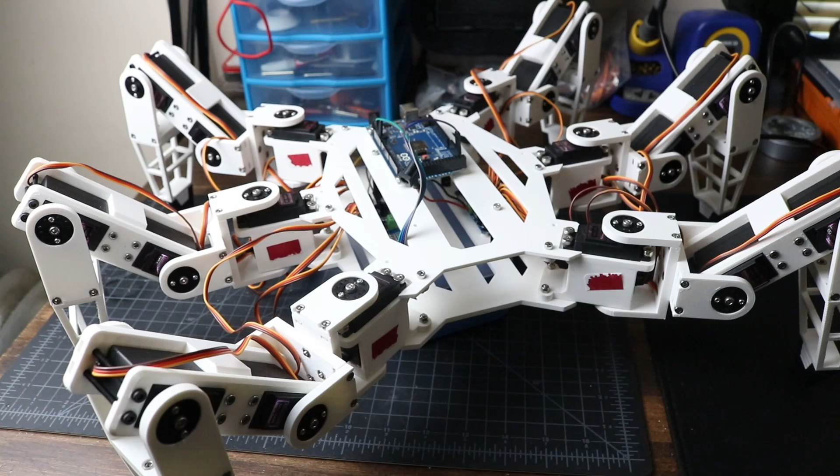In the last video, I started working on the leg design for my new Hexapod robot. Today, we'll be finishing the mechanical assembly and start working on some of the electronics. So without further ado, let's get started.

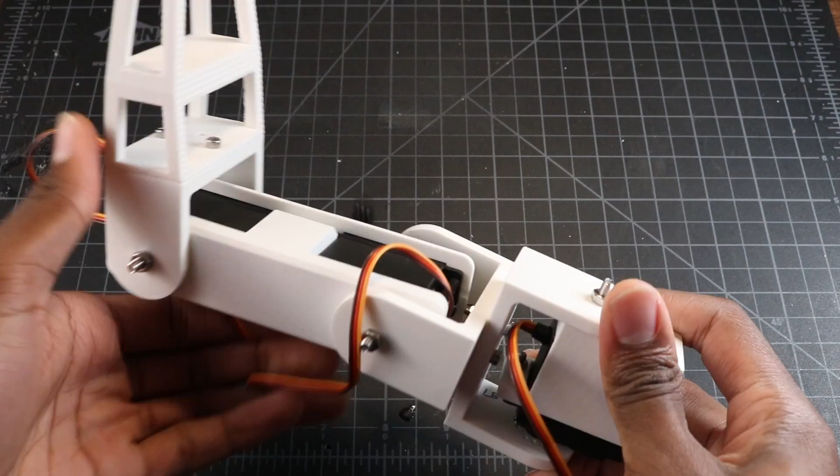The current design for the leg is quite functional, and to be honest, not much needs to be changed. In the previous video, however, I did mention a handful of things I wanted to modify about the design to help improve functionality and assembly times. To start, I redesigned the servo holder for the first servo in the joint to add a spot for it to attach to the body plates of the Hexapod.

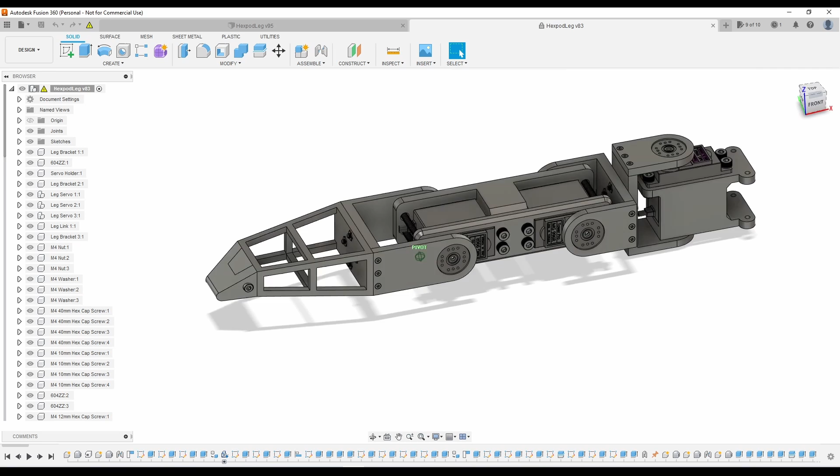Each leg will get attached to the main body with either 2 or 4 M3 screws, depending on whichever is easiest. I then broke up the tibia portion of the leg into 2 pieces, the main tibia and the foot tip. I did this so that I could print the foot tips in different materials to help improve grip, while also making the parts a bit easier to print out. They get attached together using a single M3 screw and a captive square nut inside the foot tip.

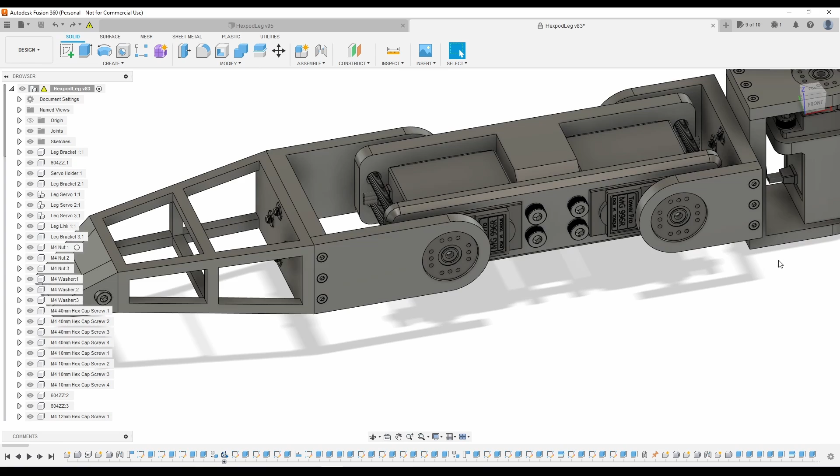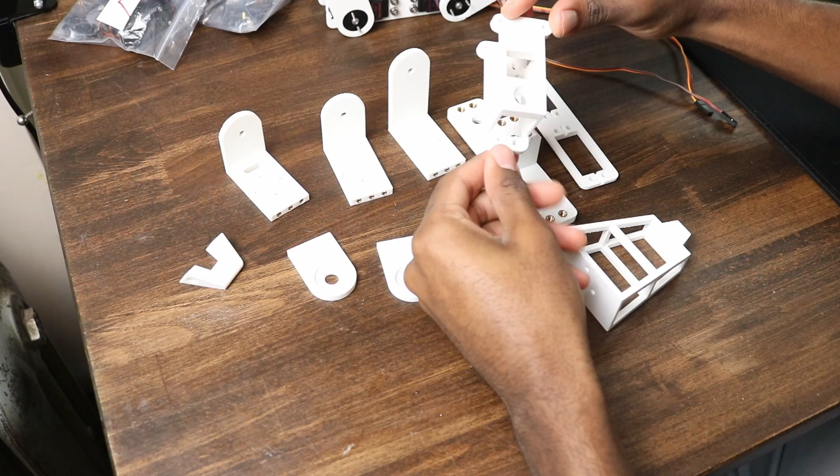I also increased the length of this bracket for the tibia so that the leg has a wider range of motion. I kept the overall lengths of each part of the leg the same as before, since the size of the prototype leg seemed proportionally correct. After making these changes, I decided to print out the parts and assemble another leg to see if things were working as expected. While assembling, I started to get frustrated with the tiny M2 screws I was using for the brackets, since they were harder to drive in than the other screws. But besides that, the design changes were working as intended.

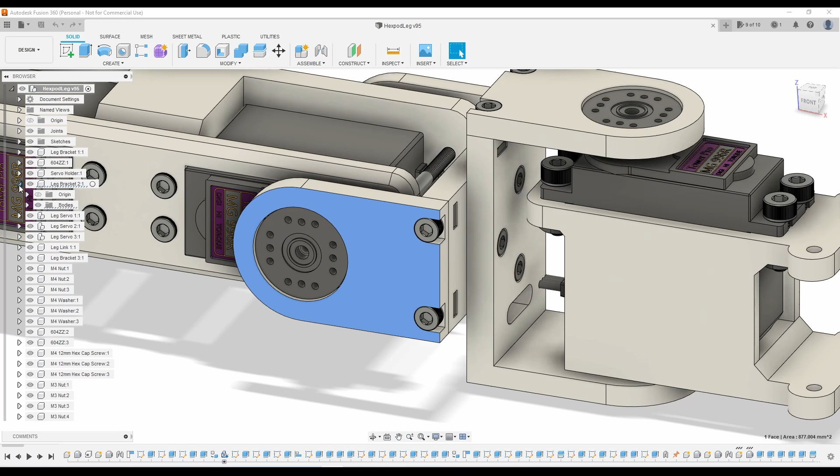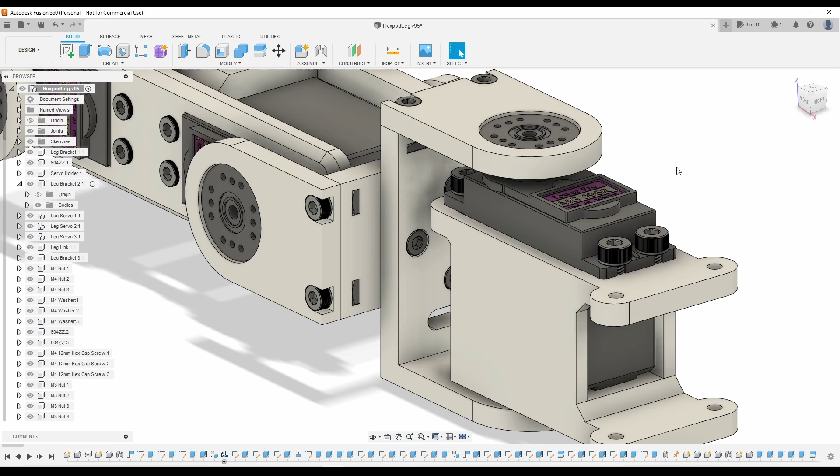I went back into Fusion 360 one more time, this time modifying all of the brackets on the leg so that they are now all put together using 2 M3 screws and 2 captive M3 square nuts, instead of the M2 screws with the threaded inserts I was previously using. I did this to help decrease the number of parts used for the robot overall, and to reduce the price since the threaded inserts can be more expensive depending on where you buy them from. I also switched out the M4 screws and threaded inserts on the femur for M3 screws and captive nut slots as well.

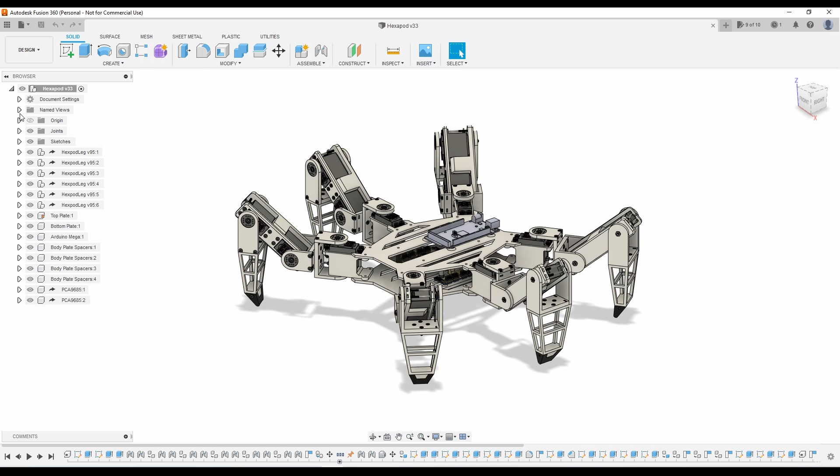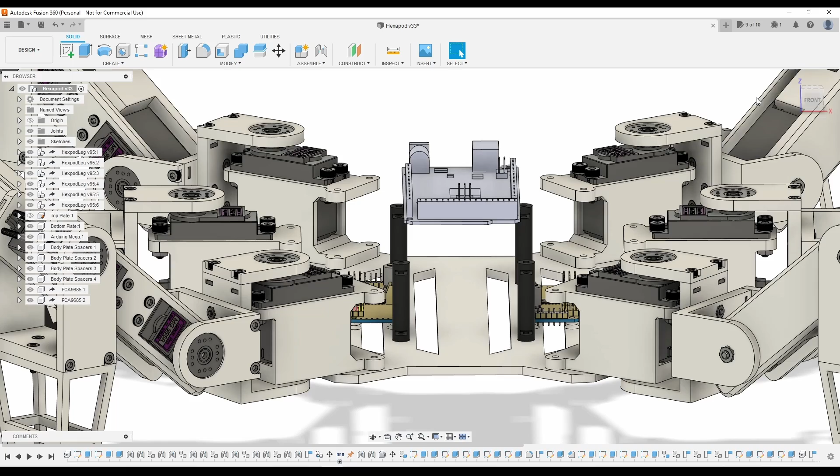For the body of the Hexapod, I'm going to keep things simple for now by only adding a space to mount necessary components: the main microcontroller, likely an Arduino Mega for now, 2 PCA9685 16-channel servo drivers, and a battery. The body will consist of 2 plates that get sandwiched together and connected to the servo holders for each of the 6 legs. To support the center of the body, I'll be using these custom spacers that have slots for 2 M3 square nuts. 4 of these should be enough to keep the body rigid and prevent any flexing during movement. The 2 servo drivers and the other power management stuff will be mounted to the inside portion of the body plate using some generic mounting screws.

In the future, I'd like to mount some more electronics to the body, like a Raspberry Pi Zero, Pi camera, an IMU, and any other sensors I'd like to mess around with. There's plenty of space for all that. I'll just need to modify the design a bit more to add mounting holes for everything else when the time comes. That'll have to wait until later though. So for now, let's get these parts printed and start assembling the robot.

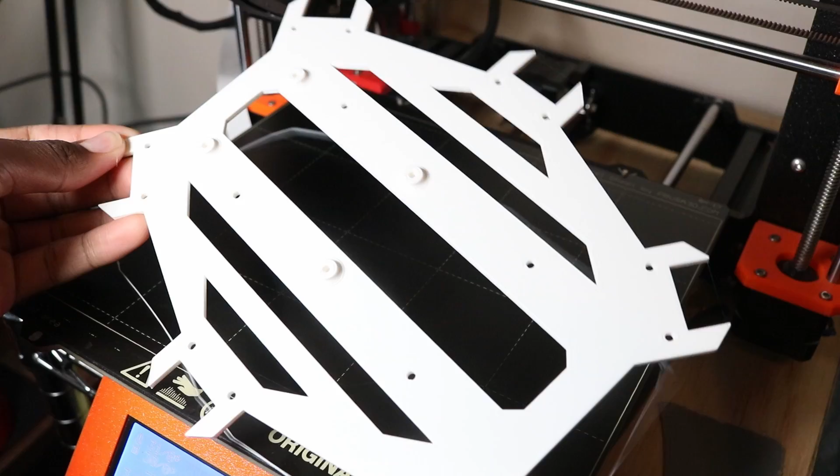Assembling the legs is a straightforward yet repetitive process. One important thing to note is that half of the legs will need to be assembled mirrored. This will make it easier to program later on when I'm working on the software. Otherwise, I might have to do some extra math when working on the kinematics for the robot.

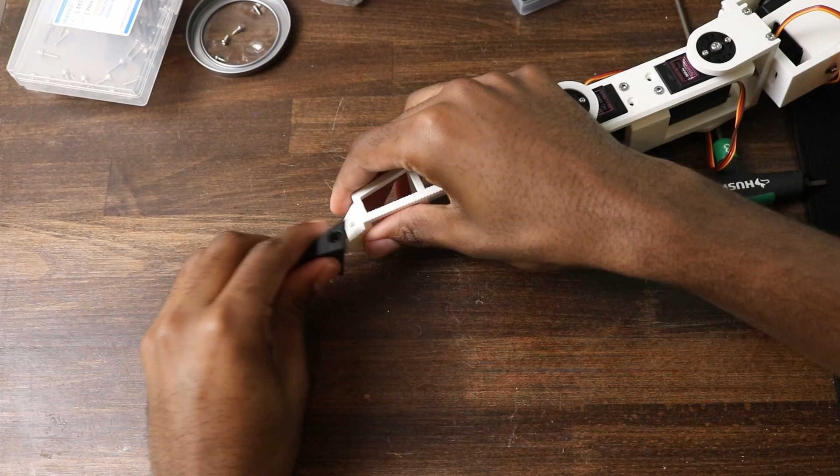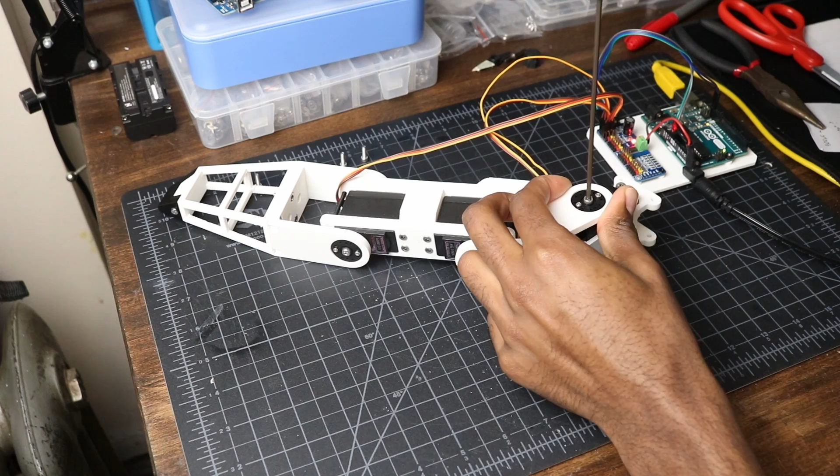Before I can mount the assembled legs to the body plates, I need to calibrate each leg. The calibration process is simple. I just set each servo motor to a specific angle and then reattach the brackets in the correct position. It's important to do this now so that when I'm programming the Hexapod to walk later, I can assume each leg will move to the same position for a given angle, hopefully within some small margin of error. It also ensures that I get the full range of motion needed to actuate the legs during movement.

To help with this, I made a simple Arduino sketch that will move each servo to the correct positions for the mounting brackets and then test the range of motion for each joint.

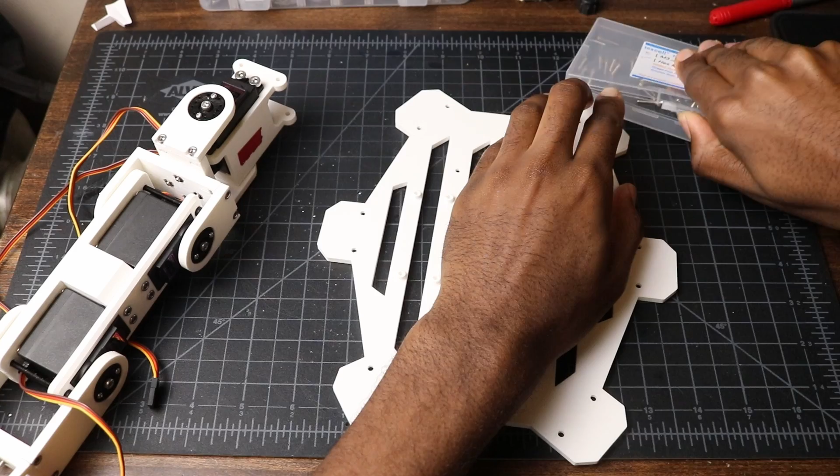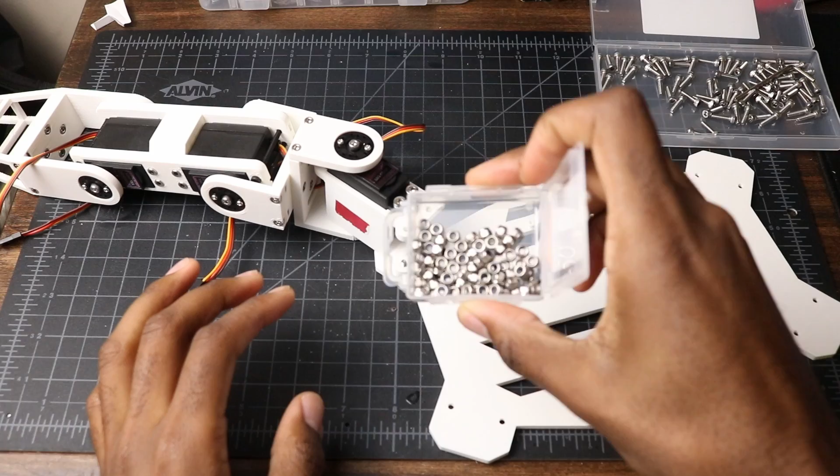With the legs calibrated, I began attaching them to the bottom body plate. Here I'm just using some of the leftover M3 12mm screws and M3 lock nuts to secure the legs to the bottom plate. The lock nuts will ensure things stay rigid and connected, protecting them from vibrations during movement.

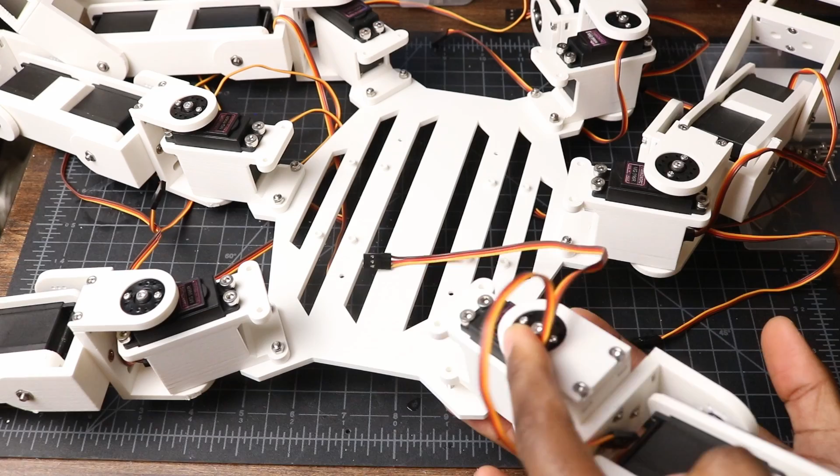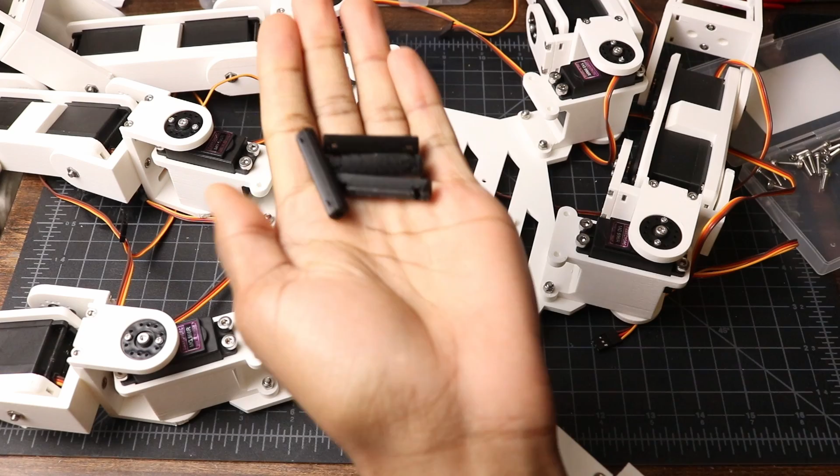The top plate will be connected in a similar fashion using the same M3 screws, except this time I'm just using regular M3 nuts. To keep the middle portion of the plates rigid, I installed the 4 spacers to the middle of the body plate. This will hopefully prevent the plates from warping or bowing in the middle.

And with that, I've completed the mechanical assembly for the Hexapod. I'm quite happy with how the robot has turned out. The aesthetic is on point for what I was going for, with a simple yet sleek design. It almost looks like a wireframe outline of a hexapod rather than a hexapod itself, which I think looks pretty cool. Not only that, but I'm also happy with the amount of space I have to mount some electronics like a Raspberry Pi, camera, and IMU, among other things.

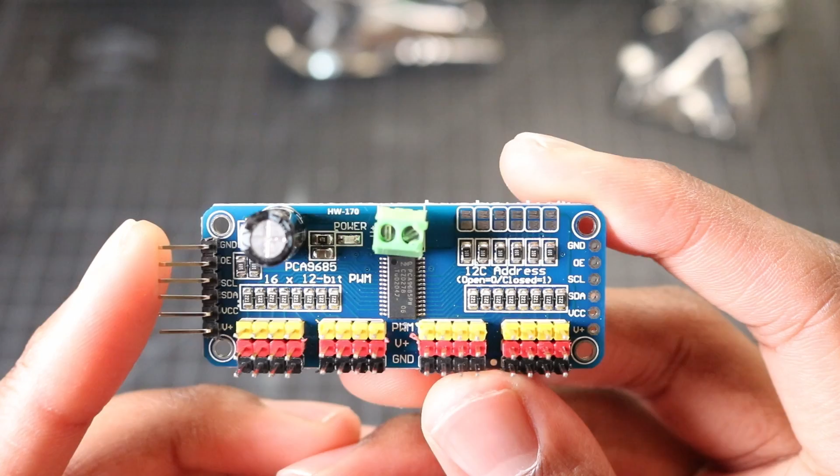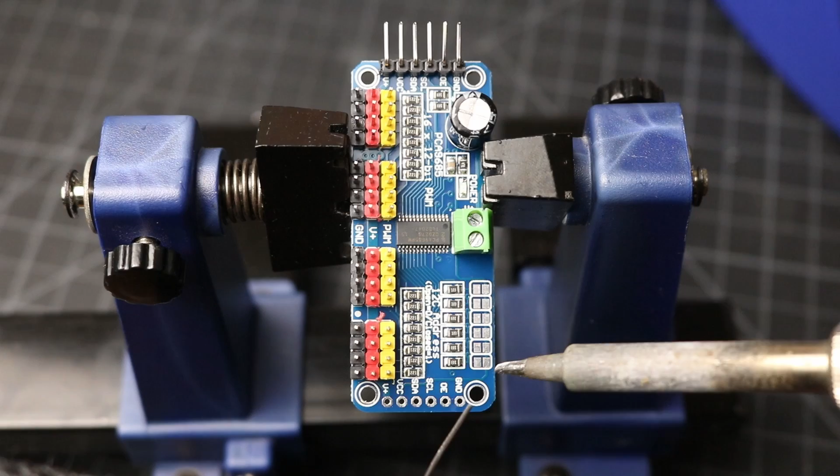That being said, let's get started on the electronics and hopefully get part of the robot working by the end of this video. For the electronics, as discussed in the last video, I'll be controlling the servos using 2 I2C servo drivers, one for each half of the robot. These drivers use I2C to communicate and will be connected to the Arduino Mega via its I2C pins 20 and 21. In order to connect the 2 drivers to a single I2C line, I first need to bridge the A0 jumper on one of the drivers. This changes that driver's address from the default 40 to 41 in hexadecimal. Now I can communicate with both drivers on a single line without issue.

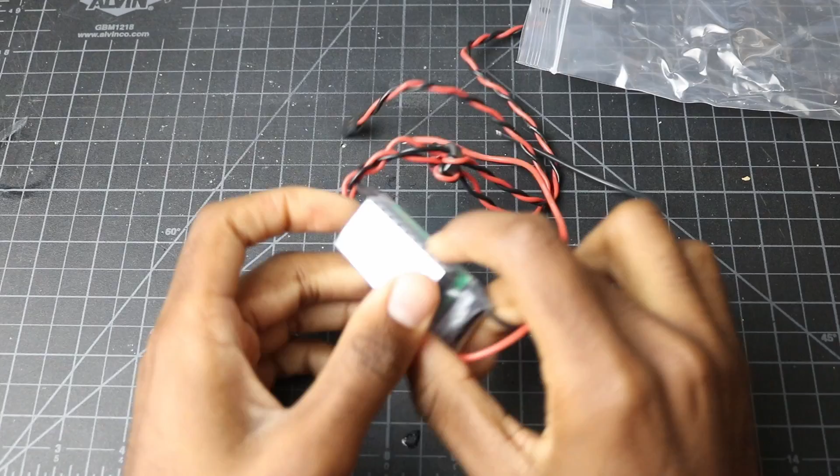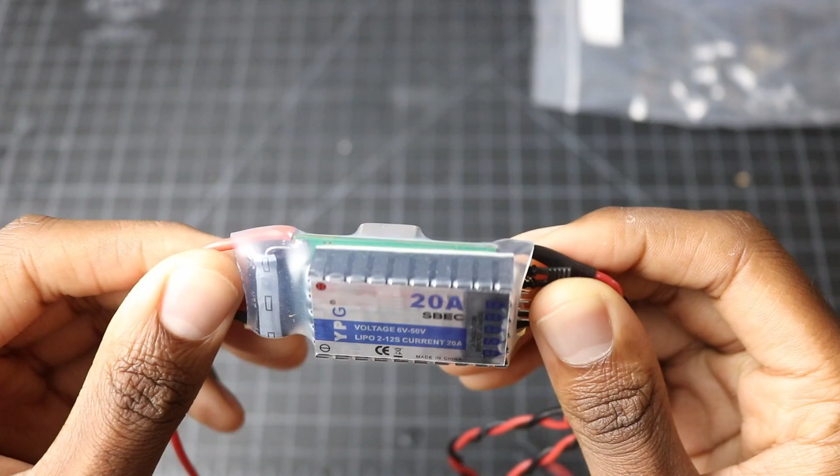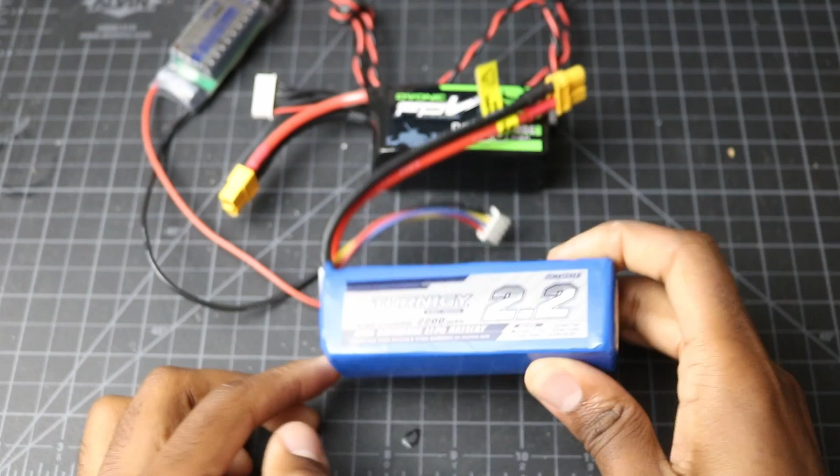To power the drivers, I picked up this SBEC, or Switched Battery Eliminator Circuit, from Amazon. By setting the desired output voltage using the included jumper, you can produce a regulated output voltage and provide up to 20 amps of current. The SBEC will help convert the input voltage from a LiPo battery to a usable 6 volts for the servo motors. Unfortunately, I don't have the correct LiPo battery at the moment, so for this video I'll just stick to powering the legs one at a time using the 5V 4A power supply I used to test the legs before.

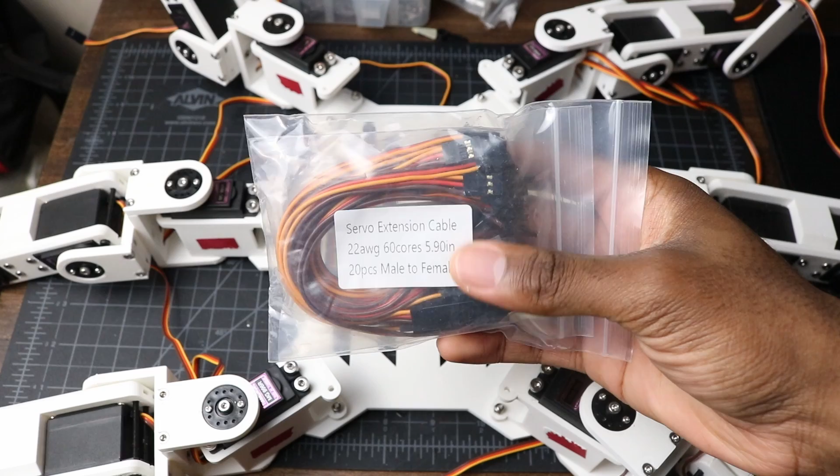The 2 servo drivers get mounted to the bottom plate using some M2.5 screws. Each driver is powered from 5 volts via the Arduino Mega, and their I2C pins are both connected to the I2C interface on the Arduino. Some of the servo cables are too short to reach the drivers or would simply have too much stress put on them during movement. So to fix this, I picked up some servo extension cables, which should give the cable enough slack so that the robot's legs can move freely. All 6 legs get connected to the driver on the corresponding side of the robot. Now that everything is connected, let's go ahead and test out the movement for each leg.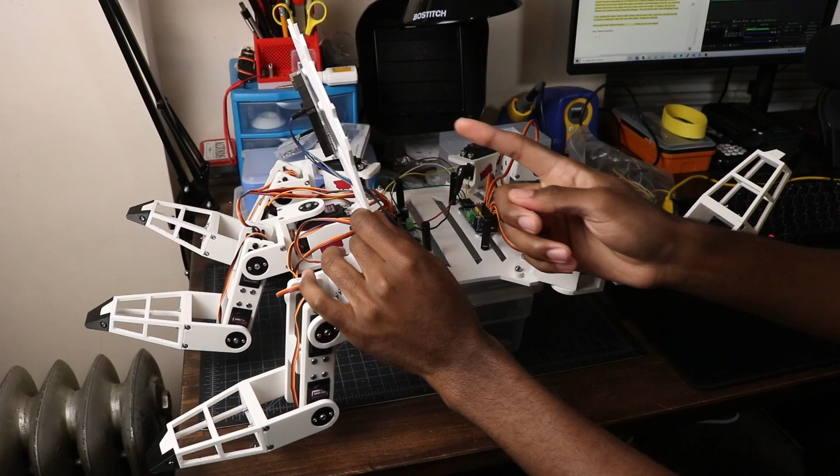Alright, so we have everything wired up. We have these 3 legs wired up to the left servo driver, and we have these 3 wired up to the right servo driver. And then on the inside, we have the 2 servo drivers daisy chained together for the I2C and power. And then we have that coming out and going to the Arduino Mega, resting on the top of the Hexapod.

So what I'm gonna do, I'm gonna run a script that'll allow me to test each of the legs one at a time, so that, one, I don't blow power, because the power supply I'm using is only 5 volts, 4 amps, and I need way more than that to power more than one leg at a time. But two, just to minimize anything breaking or slamming into tables or anything like that.

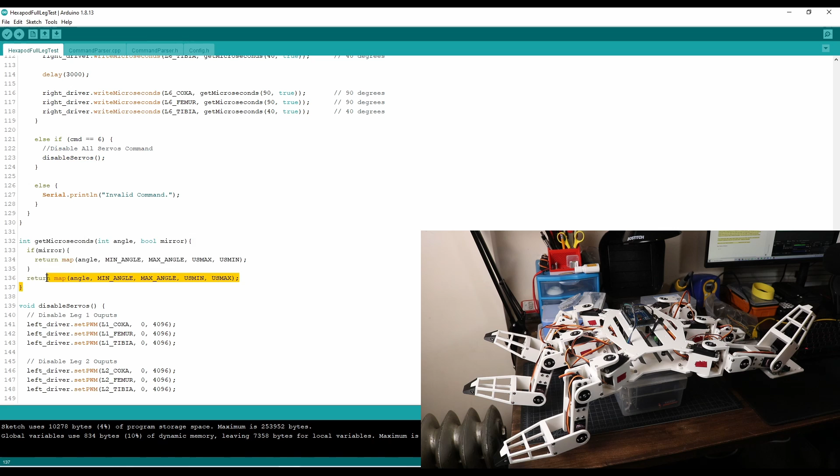So the code that I wrote here is pretty simple. It initializes both of the drivers using the Adafruit library. And then I'm using the same command parser that I designed for the robot arm to basically allow me to actuate each of the legs individually. And I also added another command to just disable all of the servos, and the hope is that there will be no current draw from the servos if I disable it between moving them each. Then there's some more math here, just mapping the angles and mirroring it for the other side. We have the config, which has all the servo channels, the microsecond range, the max angle, min angle, all that good stuff.

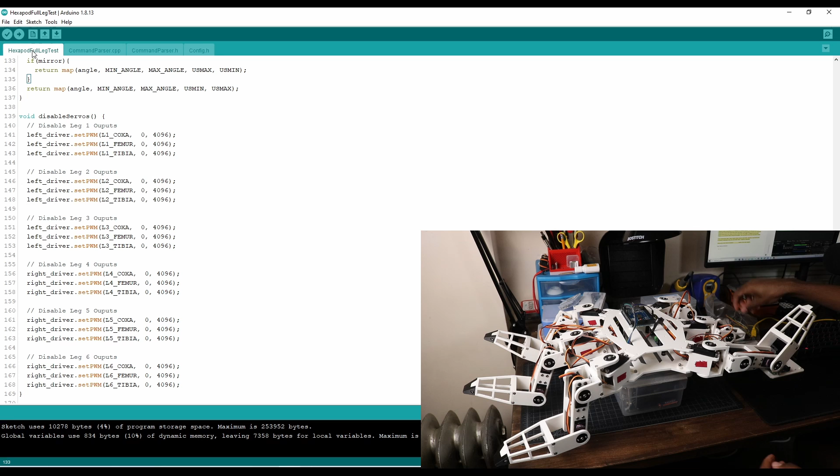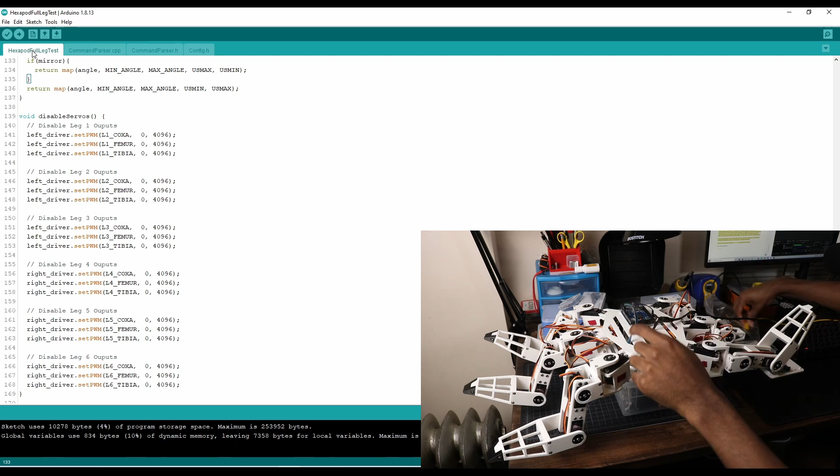So this is the first time I'm testing out moving all of the legs put together like this. So we're gonna go ahead and start with powering the driver. We're doing the left side first because each driver is going to be powered individually. So 5 volts, 4 amps going into the left driver. And now I go ahead and plug in the Arduino Mega.

And I'm going to go ahead and upload the sketch again. All right, done uploading. Open up the serial monitor. And now you can see it says setting up right servo driver, setting up left, ready. So we're going to start by actuating leg 1. So the way the legs are numbered, this is leg 1, and then you just count counterclockwise. So 1, 2, 3, 4, 5, and 6.

So let's try actuating leg 1. Extends it out. Yep. So that worked, but as you can see, the robot is too close to the table, so I almost broke it. So I'm just gonna have to stack it up a bit higher so it doesn't hit the table again. I'm gonna have it move the first 2 joints first, so that it'll go like that, and then it'll move the tibia. That way we don't crash into the table and break anything.

All right, made all of the changes to the code. So now I should be able to try leg 1 again. So again, let me tilt this a bit. We're paying attention to this leg right here, this back leg. So it should straighten out like so. And then it should, oh, I see what the problem is. I'm going the wrong way. Turns out I had the angles going in the opposite direction, which is the real reason it kept hitting the table. So now we should definitely be good.